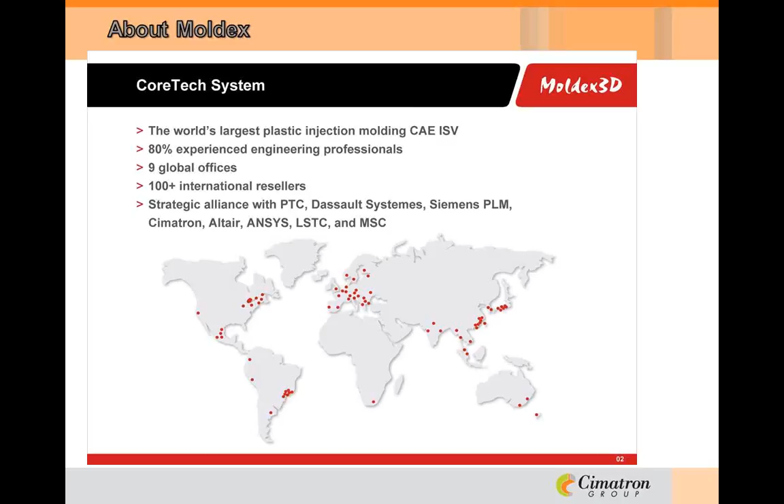Okay, thanks, Ralph. Moldex has a rich history of innovation and growth as a true industry leader. After combining various resources from academics, industry specialists, and customers, the predecessor of Moldex 3D was first released in the early 90s. It is believed to be the world's first CAE program to run on a Windows platform. In 2004, Moldex 3D was the first injection molding CAE to support parallel computing.

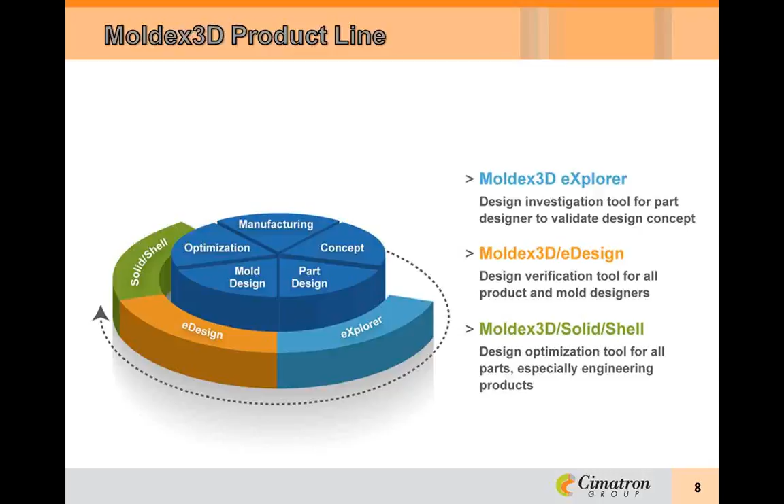Moldex 3D Solid Shell offers more advanced tools to decrease your product-to-market time and to improve the quality of the design with comprehensive analysis results. Today's focus will be on the mainstream product, eDesign. These 3 products present a single unified platform for all designers and CAE specialists at every stage of the product development cycle. It integrates all of your innovation, efficiency, and productivity to reach your design expectation and product optimization.

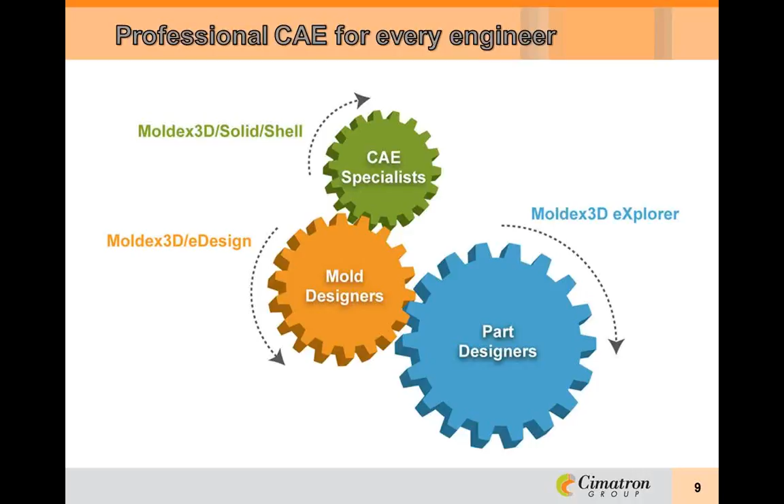In the design phase, there are several often difficult key decisions which product designers must make. For example, how to design the proper wall thickness and how to deal with thin wall products. What potential defects will be found during the tool design and molding process? These questions are extremely complicated and frustrating for product designers. What's worse is that they often do not have any tools to prove out their design concepts. Many times, the only way out for them is to hold the tool builder responsible for these corrections.

My background is tooling, and I happen to know the tooling guys are so nice, they often do this for free anyhow, right? The truth is, these problems should have been solved before the mold design phase. The reality is, both of them definitely need to think about these issues.

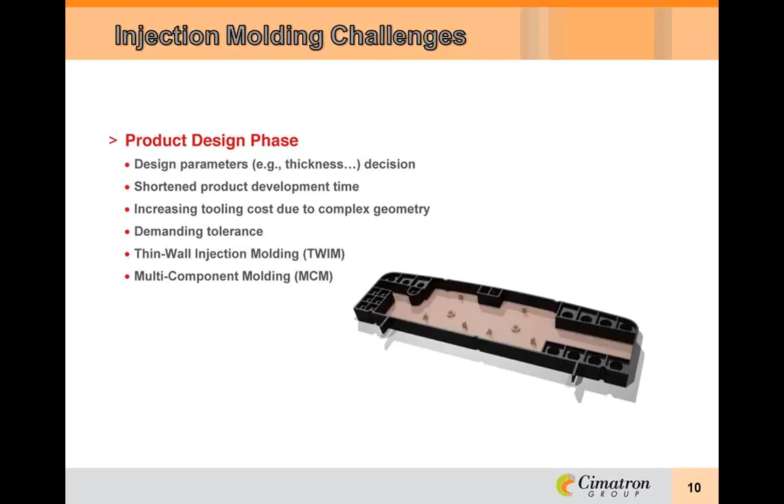The primary tasks of an injection mold include the accommodation and distribution of the melt, precise temperature control to properly solidify the material, and ejection of the molded part. Additionally, a mold has to provide good tooling or steel conditions and mechanical functions such as slides and lifters, all while holding tight tolerances on the part after the warpage and shrinkage of the solidification of the material. This places an enormous challenge on the mold designer.

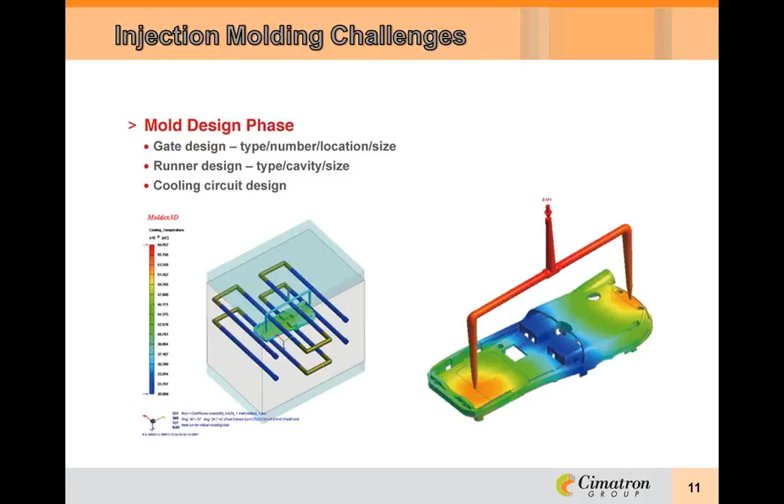eDesign supplies the tools to help evaluate the size and layout of the runner system, gate location and type, adequate cooling circuit, and appropriate number of cavities.

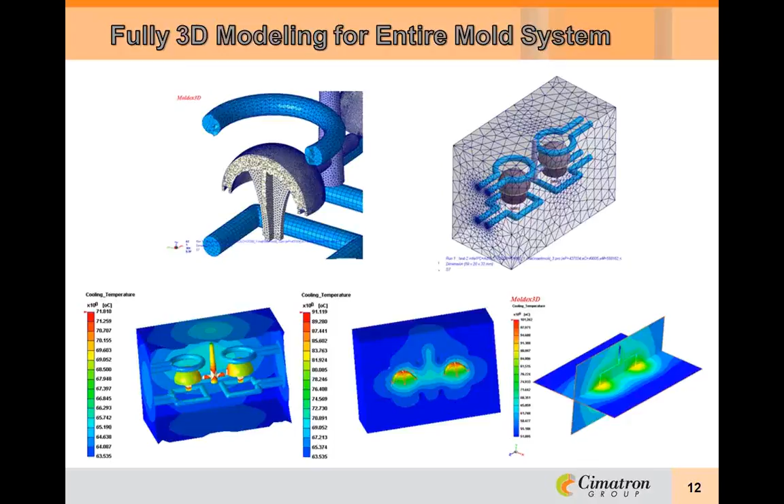Taking some of the guesswork out of the design process is made further efficient since eDesign can take CAD data directly from your 3D mold design in order to simulate the actual process conditions before any steel is ever cut. As you will see later in this presentation, with parallel computing ability and the few required steps to get to the simulation, you will see that there is very little time invested for maximum return of prediction and knowledge.

Burn marks, black or brown burnt areas on the part, usually located at the furthest point from the gate where the air is trapped. A weld line, also known as a knit line, where the flow front meets. Sink marks, which would be localized depressions, usually in the thicker areas of the part. Warpage, which of course is just the part that's been distorted during the shrinking process. And flash, which would be excessive material, usually in thin layers that leak out at the parting line and of course exceed the normal part geometry.

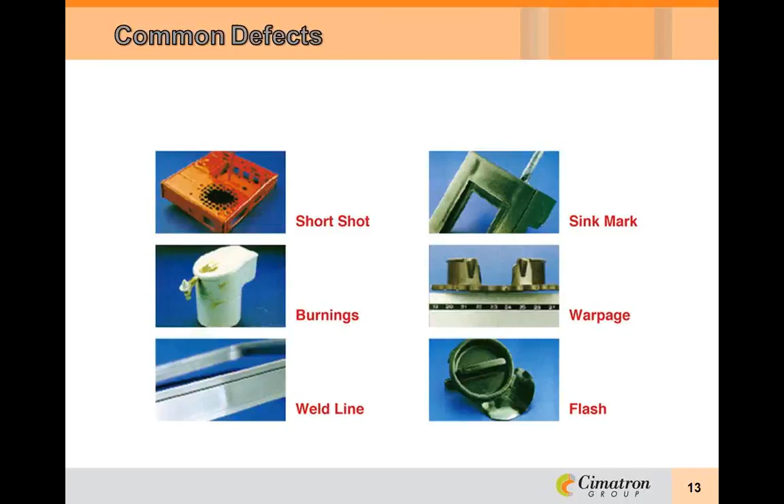With the CAE approach, a process simulation is launched before the prototype mold is ever constructed. In other words, prototyping is done on the computer. In the design phase, a part designer evaluates the influence of material selection and processing on the various part specifications. The analysis is based on physics principles and actual conditions, rather than a rough estimate from handbooks. Part wall thickness can be optimized to facilitate its processing feasibility and product performance. Part design is very flexible since the real mold has not been built yet.

In the mold design phase, the design is further refined by adding molding considerations. Runner system and gate are designed according to the process dynamics simulation. Cooling system is optimized to shorten the cycle time and improve part quality. The molding trial on the computer is possible before the actual molding trial is ever conducted. In this way, mold construction has not begun until the molding trials on the computer meet the requirements. The interrelation of part design, material selection, part performance, and processing is all taken into account. Modification of part design and mold design is flexible and concurrent.

After the mold design is accomplished, the mold is constructed and actual molding trials are conducted to evaluate the mold's feasibility. The time and materials, also known as money, used in molding trials and part testing are minimized since the design has been comprehensively evaluated. Production can then begin and the product development is finished.

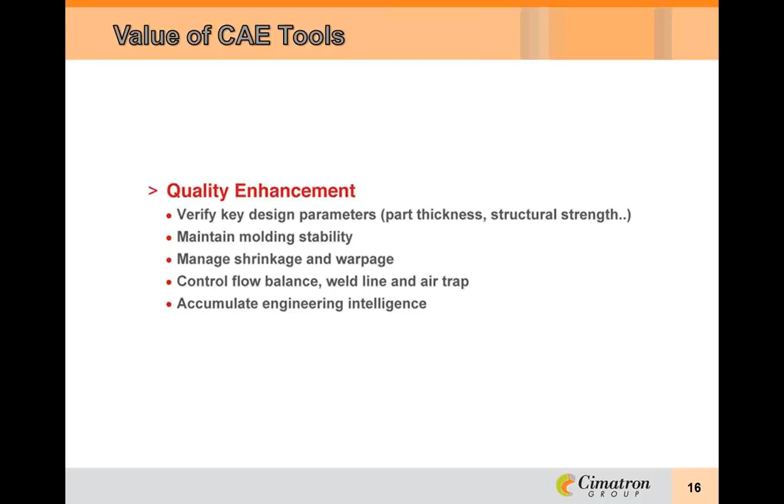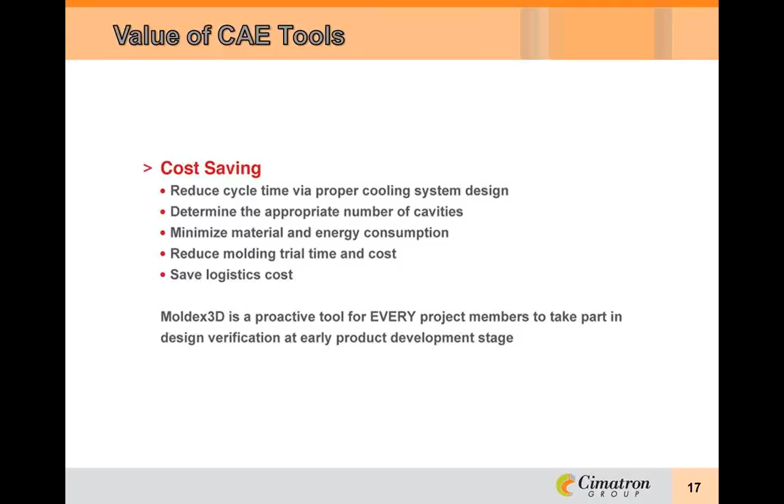In fact, unprecedented global competition is pressing industries to meet various customer demands for better quality, lower cost, eco-friendliness, and so on. People keep looking for more cost-effective and smarter ways to improve the efficiency and profitability. Finding problems and learning solutions from trial and error is a traditional approach and very cost-consuming. To effectively eliminate uncertainty and associated financial losses, an efficient engineering tool becomes more and more necessary to increase competitiveness. By simulating the filling process of injection molded parts, Moldex3D ensures both originality and manufacturability in the design and molding phase. Design teams can easily use Moldex3D as a collaborative tool to identify potential problems and solutions.

Although Moldex3D is incredibly powerful and accurate, it is surprising how easy it is to use. There is no mesh preparation. The part model is simply imported as an STL, and the mesh is generated automatically. The runner and gates can be drawn in eDesign or imported either as STL or wireframe, which would permit parametric attributes to be assigned inside eDesign, which means that the runner, gates, and water circuit diameters can all be modified without the need for data exchange.

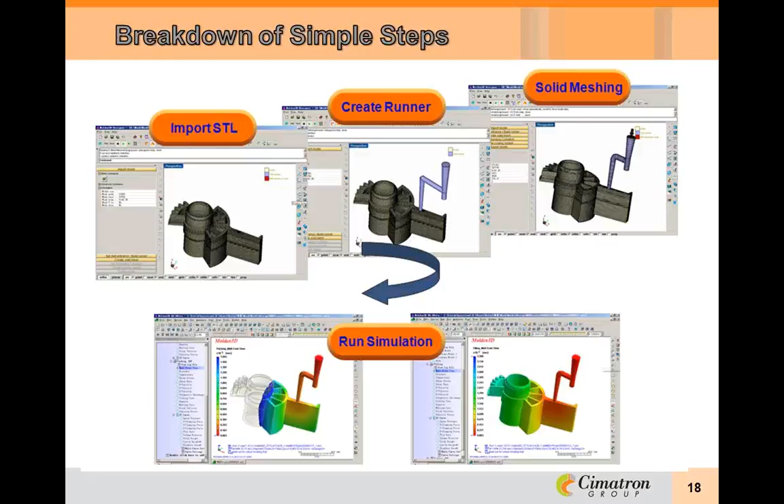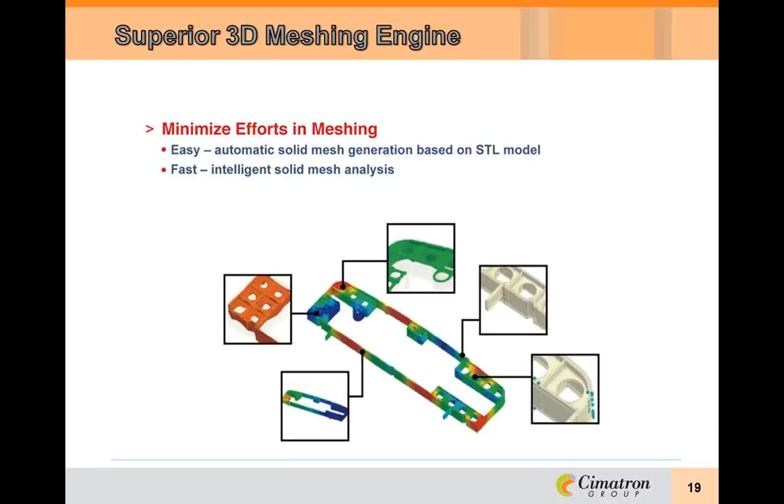eDesign provides the most friendly pre-process environment. The most advanced meshing technology is employed to help users generate true 3D solid mesh of outstanding quality without the need for any pre-process work.

eDesign Runner Wizard provides powerful yet intelligent guidance for your design. Now you can define runner systems and optimize the mold design with ease.

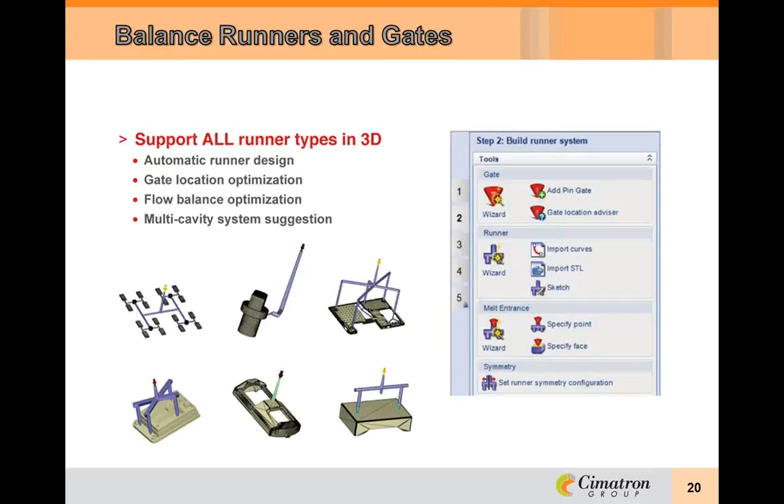eDesign also offers a cooling channel wizard. Users can quickly define the cooling circuit and configure it inside eDesign as an alternative to importing it from another CAD system. More advanced options are also available to enable customization according to the user's requirements, to automate the creation of an entire cooling system and subsequently speed up the optimization.

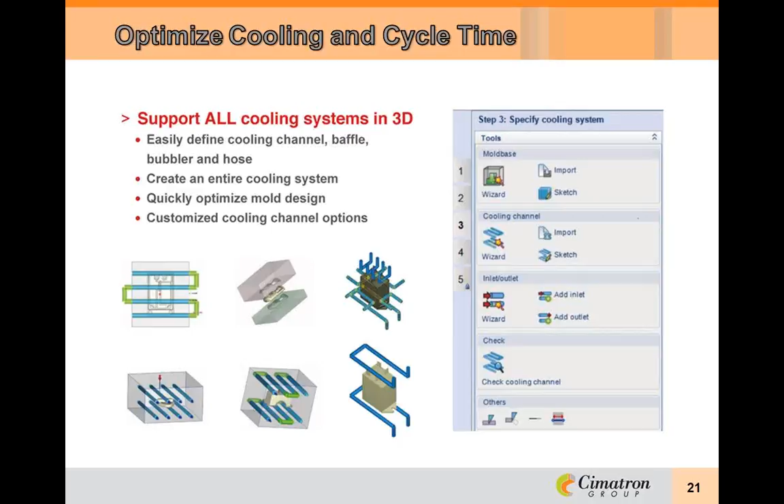Next, let's have a closer look at the Moldex 3D modules. Moldex 3D standard modules are flow, pack, cool, and warp. Advanced modules are fiber, multi-component molding, hereafter referred to as MCM, reactive injection molding, optics, viscoelasticity, and injection compression molding.

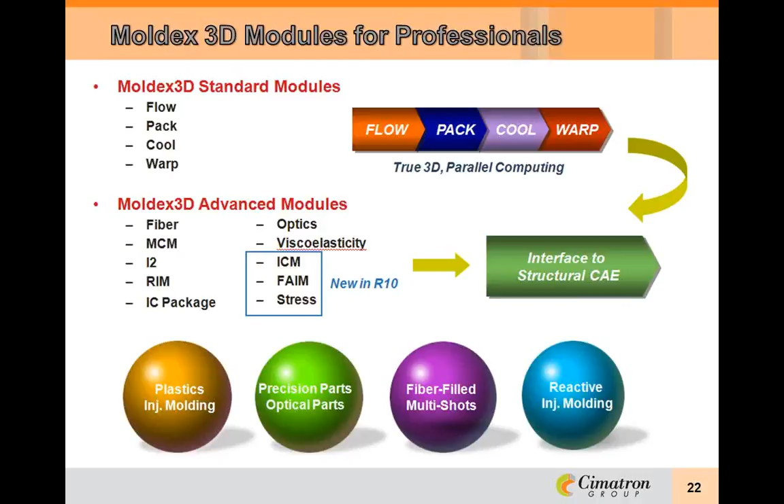eDesign Flow gives you accurate insight into solid plastic flow behaviors from a macro view to a micro view, such as fountain flow, inertia effect, and gravity effect. Users can better understand how the solid melt flow progresses, accurately identify where the knit lines are, and examine short shot problems. If more than one gate is used to fill a part, you will see in different colors the material contribution from each gate and where they meet.

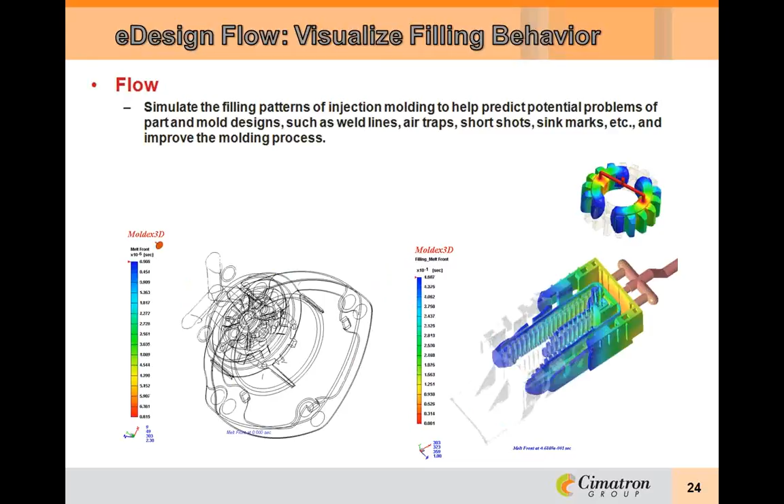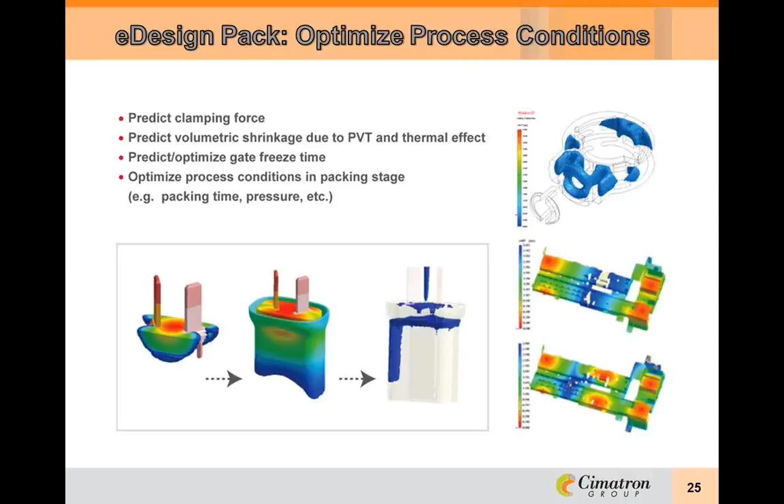eDesign Pack incorporates material compressibility, or PVT, change to account for the density variation and melt flow behaviors in the packing process for thermoplastic materials. Its true 3D technology can help you precisely determine gate freeze time, efficient packing time, and proper packing pressure to minimize areas of high volumetric shrinkage. Here we can see the packing volumetric shrinkage.

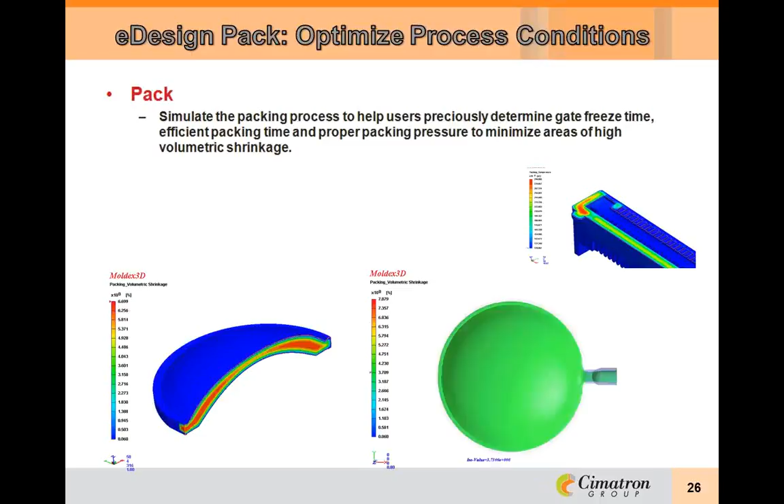eDesign Cool, with its true 3D analytical core, can accurately analyze the mold temperature, the efficiency of cooling channel layout, and the required cooling time in the design phase. It is a useful tool to detect potential defects in the mold cooling system, such as unbalanced cooling, hot spots, and prolonged cooling time due to poor cooling efficiency. You can accurately evaluate the cooling efficiency to further optimize the cooling system and reduce cycle time.

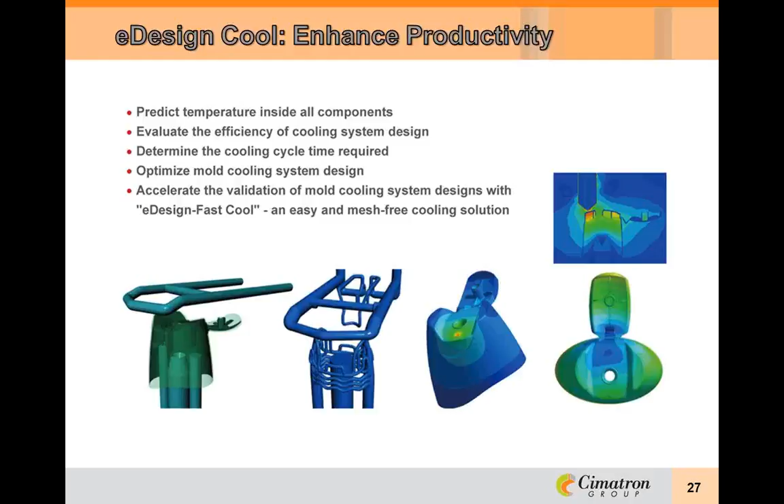Here we see dynamic slicing through the part in order to look for hot spots in the part. This will help us fully evaluate the cooling system.

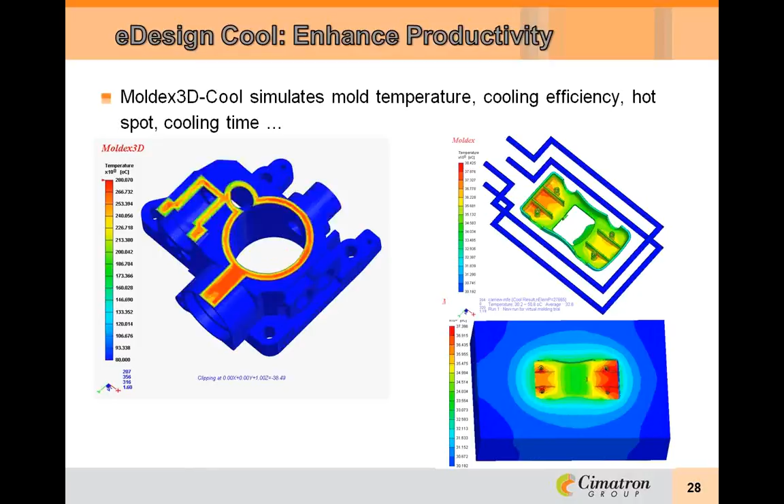eDesign Warp provides users a true 3D simulation tool to anatomize the causes of shrinkage and warpage and further control these defects before the mold is built. You can easily and efficiently improve part quality and optimize design. For fiber-filled material, eDesign Warp incorporates fiber composite theories and the fiber orientation results from eDesign Fiber to predict its anisotropic shrinkage and warpage.

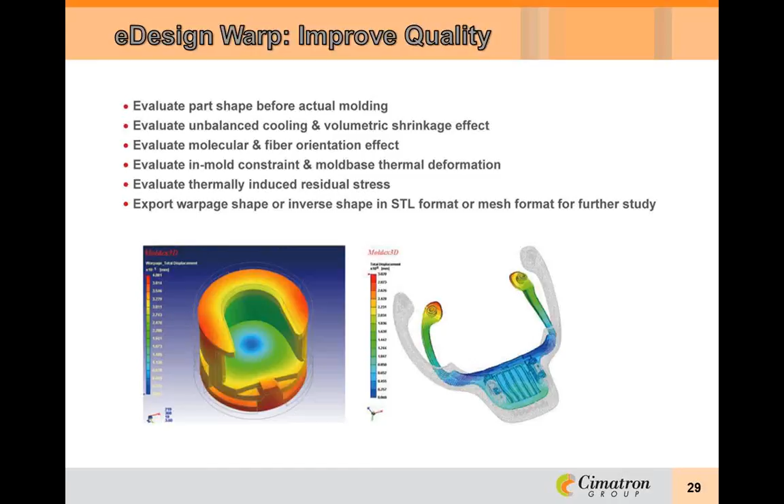Here we can see a scaled-up animation of the warpage behavior. I can't help but think of a specific automotive headliner part that I worked on just a few years back that could have really benefited from this kind of prediction. We knew it was going to warp, and we tried to cut the steel safe, but as I recall, I think that we recut that mold at least 4 times before we finally produced a part within spec.

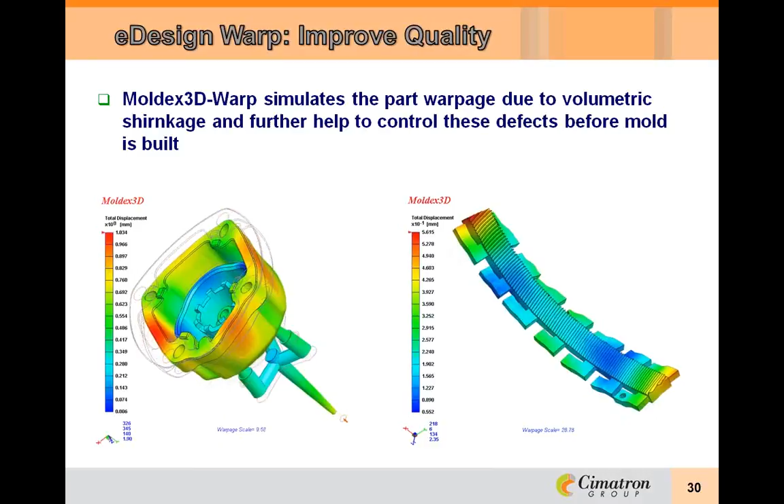Moldex3D Fiber accurately simulates the 3D fiber orientation in the mold filling process and further calculates the process-induced anisotropic thermomechanical properties of fiber-reinforced plastic parts. Users can understand the 3D orientation of fiber and further control the anisotropic shrinkage of fiber-reinforced parts.

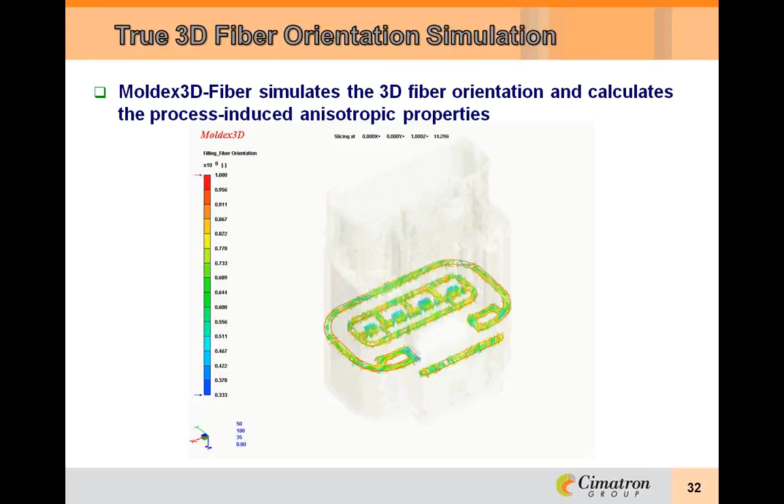Here again, we see dynamic sectioning of the part in order to better understand the fiber orientation. Here we can see the type of influence that fiber has when producing this part.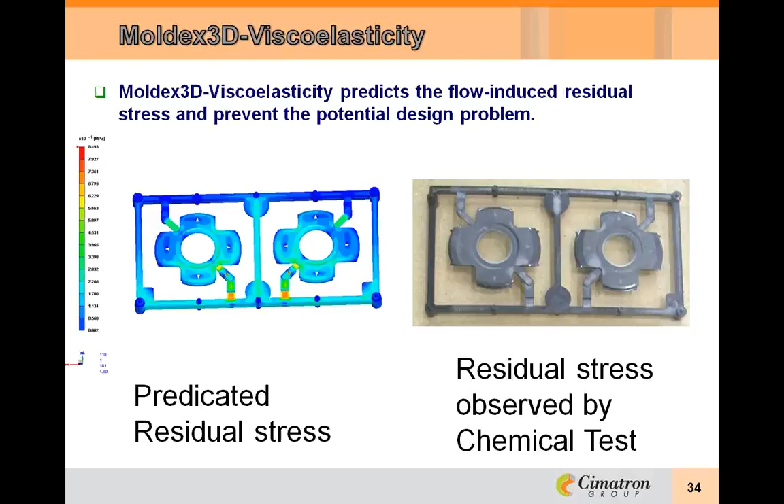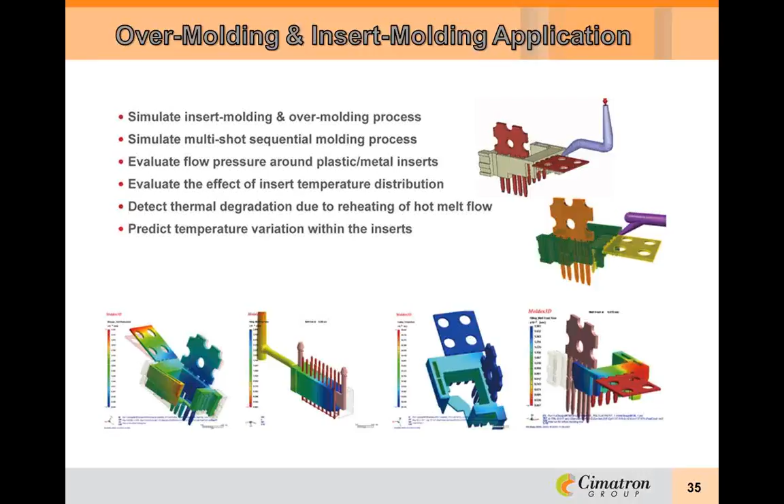eDesign multi-component molding gives you a powerful tool to accurately analyze the interaction of different components and further optimize product design. Users can freely model any kind of metal or plastic inserts and perform comprehensive analysis. With eDesign MCM, you can predict the prolonged cooling time, asymmetric shrinkage, and two-color or overmolding processes, and consider warpage of the different material combinations.

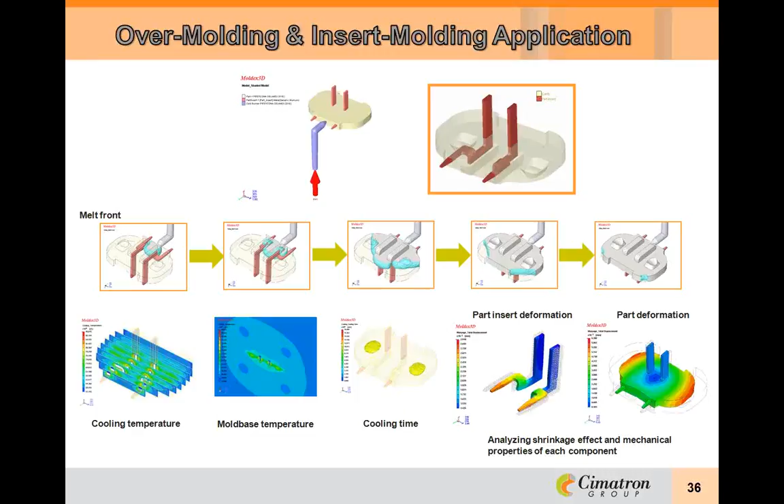Here is an example of MCM where it's looking at steel inserts around the plastic and checking them for deformation. Here's another animation that shows the warpage behavior during the overmolding process.

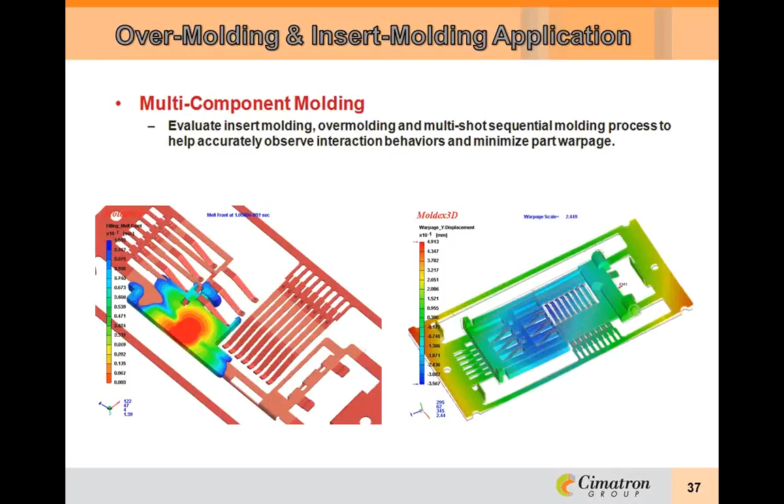Moldex3D is the only CAE solution which supports parallel computing for flow, pack, cool, warp, fiber, MCM, and so on. By utilizing the strength of multi-core computers, the time required for analysis is greatly shortened. Moldex3D parallel computing technology supports PC clusters as well.

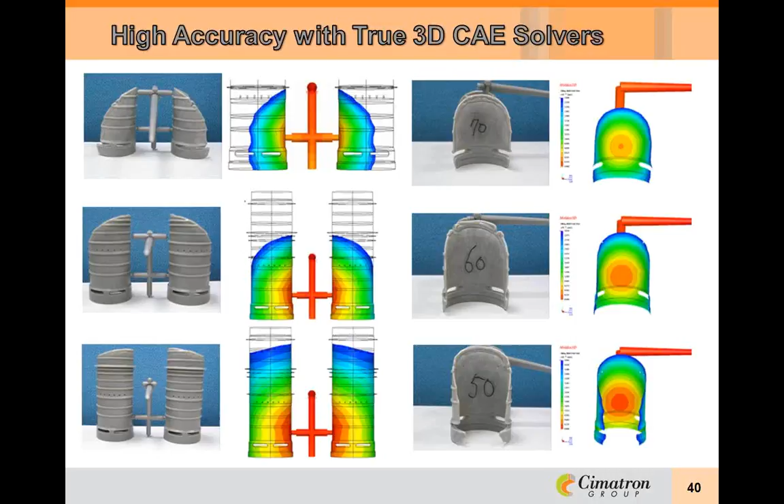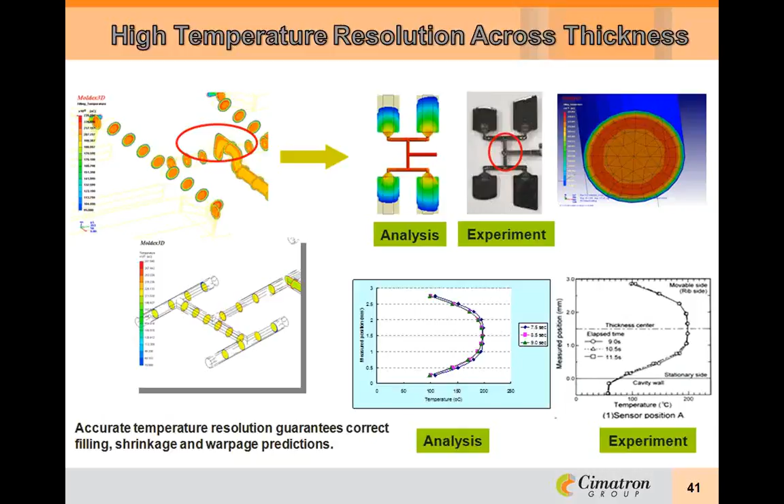Moldex3D not only simulates the part in true 3D, but also the runner system. You might question why this is important. The reason is because of what is called shear heating phenomenon. While the material is flowing through the runner system, friction is creating heat. This heat does have an impact on material flow, and the next few slides will demonstrate this.

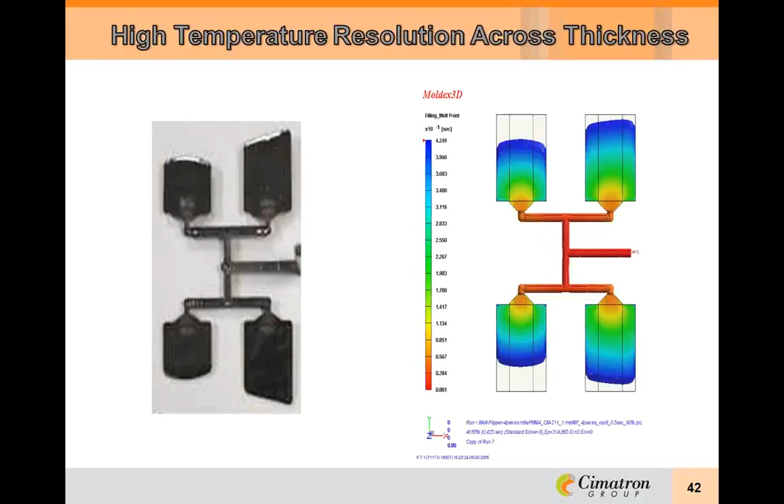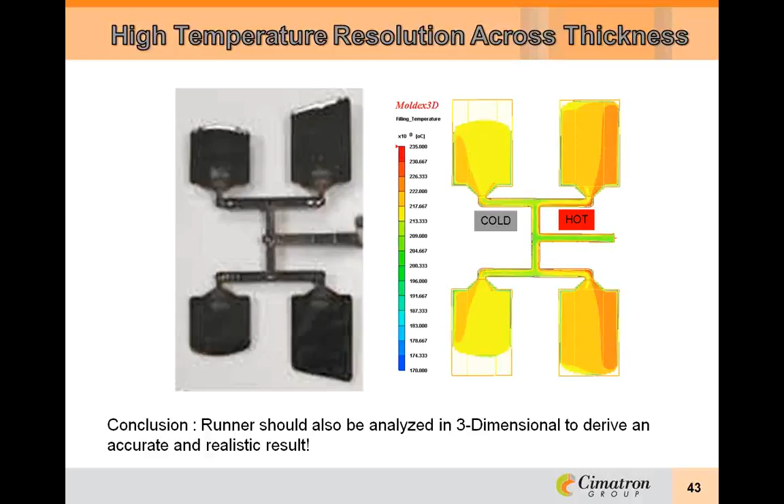The picture on the left is the left half of an actual shot of an 8-cavity mold. The simulation picture on the right predicted it due to temperature influence from the runner. And you can see where it says cold and hot, that temperature difference causes the inner cavities to fill faster. So the conclusion here is that the runner should also be analyzed in 3D to derive an accurate and realistic result.

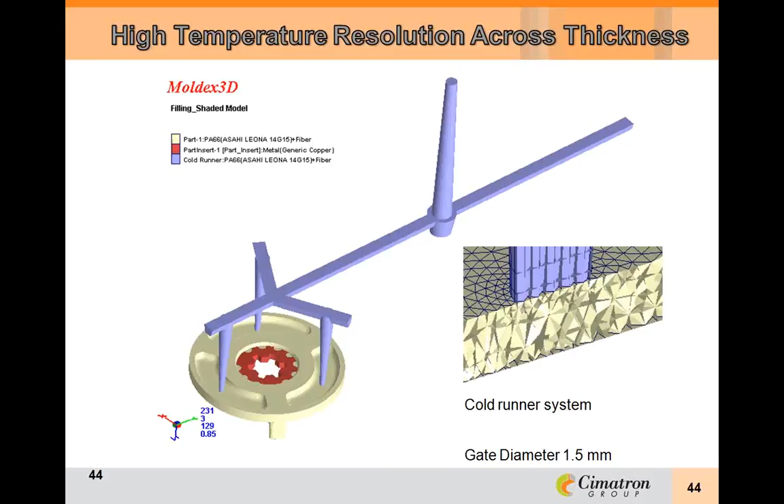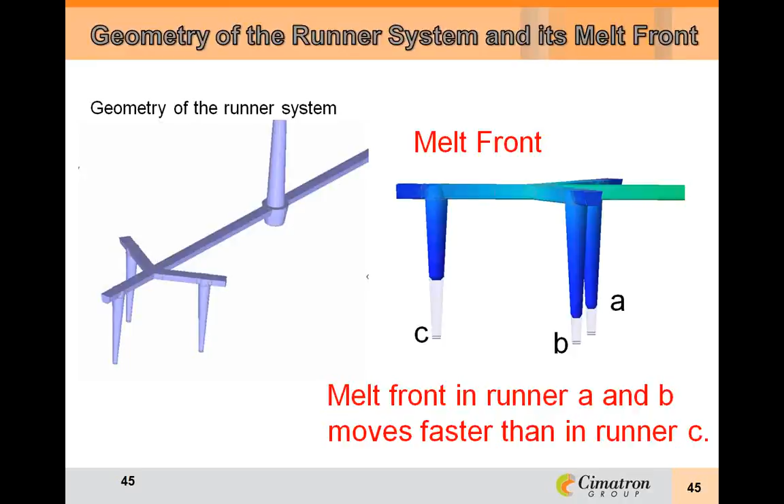Here again we see the accurate prediction of flow pattern when compared to the real molded parts. This could only be achieved by calculating the shear heating in the runner system. These are the kinds of variables that are often not considered in traditional mold designs and cannot be predicted accurately without 3D CAE software.

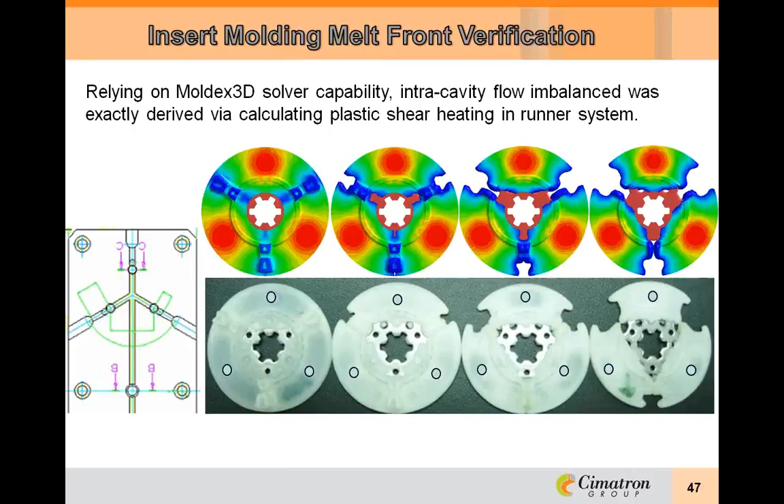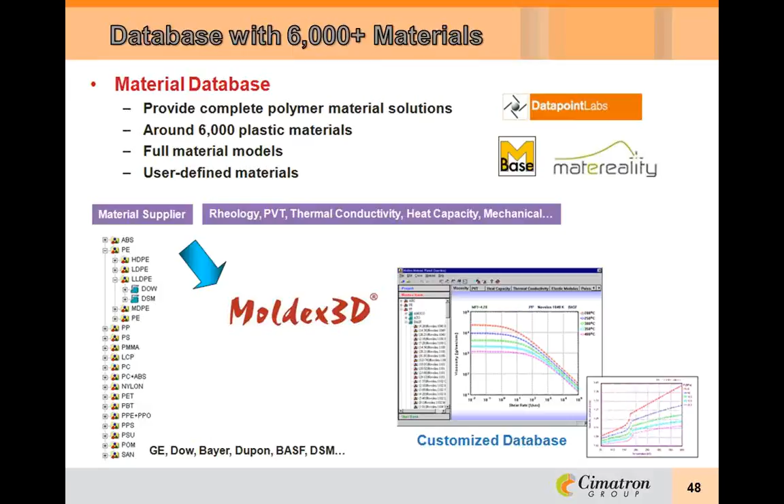An extensive material database comes standard with Moldex3D. Any materials that are not in the database can be added easily.

Best-in-class technical support can be accessed globally. Yeah, and the North American office is in Novi, Michigan.

Okay, next let's take a look at some examples.

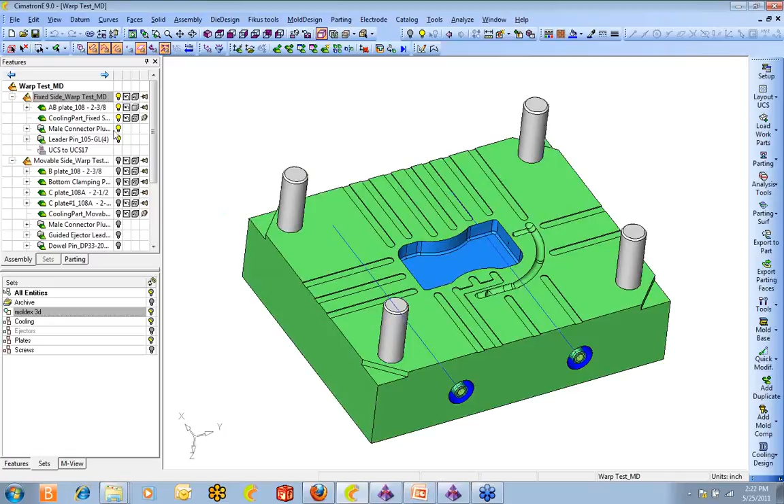The first thing that I want to show is what I started with in Cimatron. I have a 3D mold design here, and let me turn a few things off and on real quick.

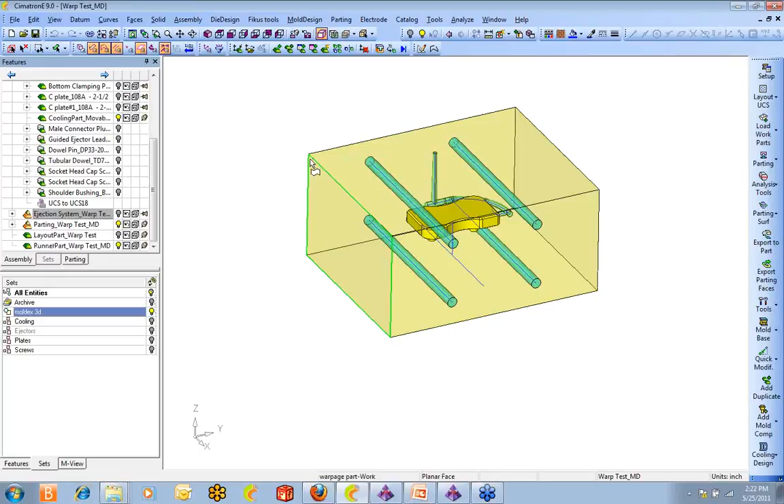All right, so I've got a 3D design ready, but what I'm actually going to take into Moldex is this. I'm taking a bounding box that represents the A plate and the B plate. I'm taking the cooling circuit, of course the part, and the runner system. But in this case, I only took the wire frame. The only thing I took as an STL was the part, and everything else was wireframe in order to set the parametric attributes inside eDesign.

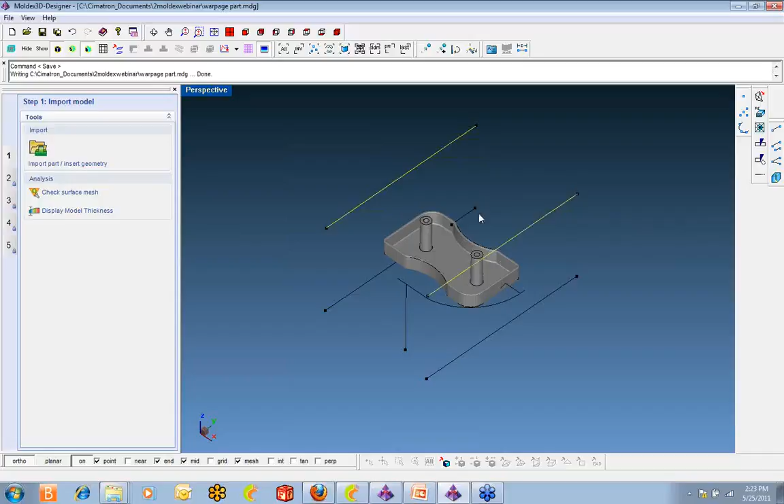Let's take a look at that. Okay, so here in eDesign, we have the part that I brought in as an STL, and of course the wireframe. So I'm going to pick on the cooling circuits first, and we're going to assign an attribute as the cooling channel, 0.438 inch diameter.

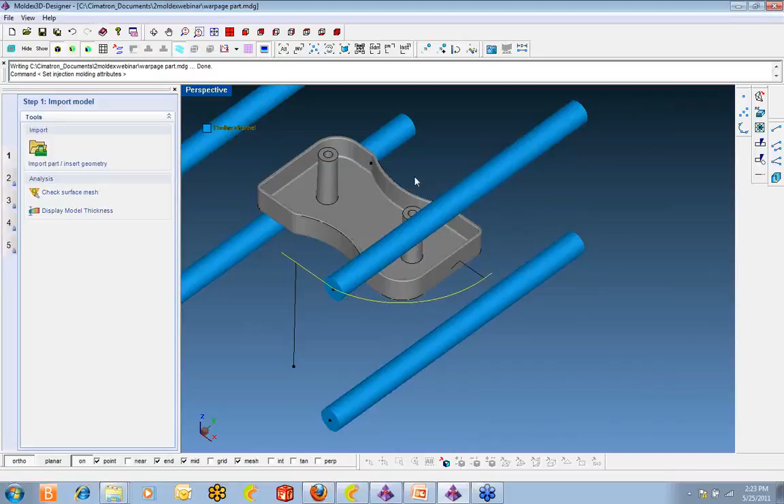And next, let's take the runner. And we're going to assign the attribute of cold runner, and this diameter will be 0.250. And this one also is a cold runner, the diameter is 0.188. This one as well. And lastly will be the gate.

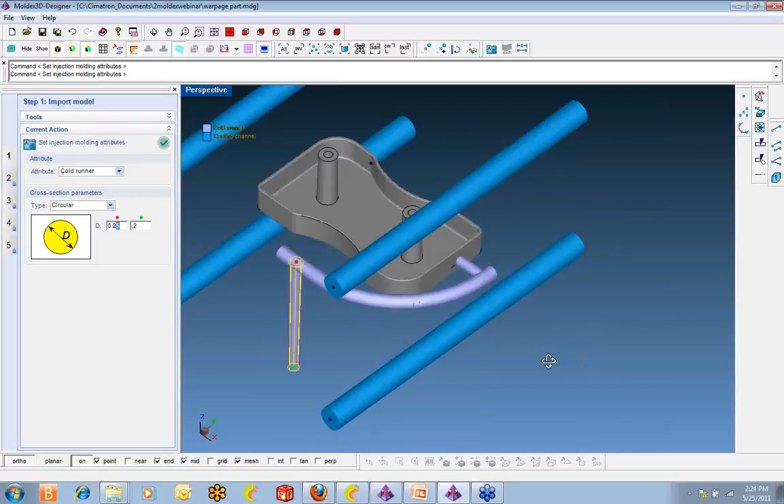Okay, and now we're going to just go through some of these steps. Yeah, I forgot the melt entrance. And the mold base - the mold base, again, is just a size representation of the A and the B plate.

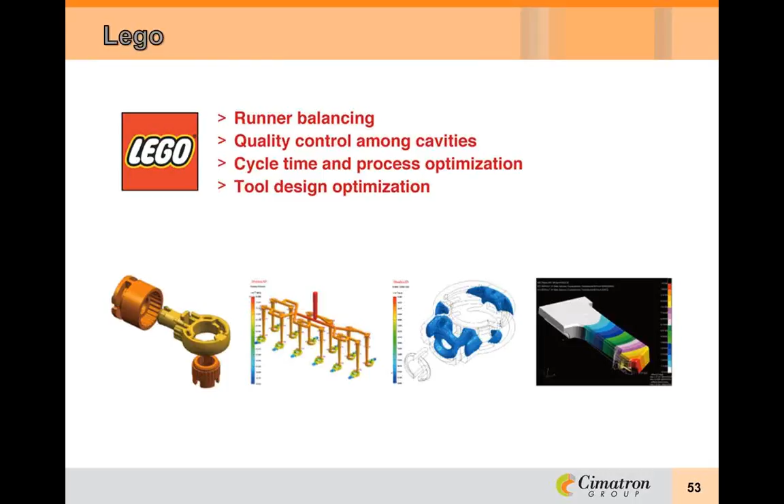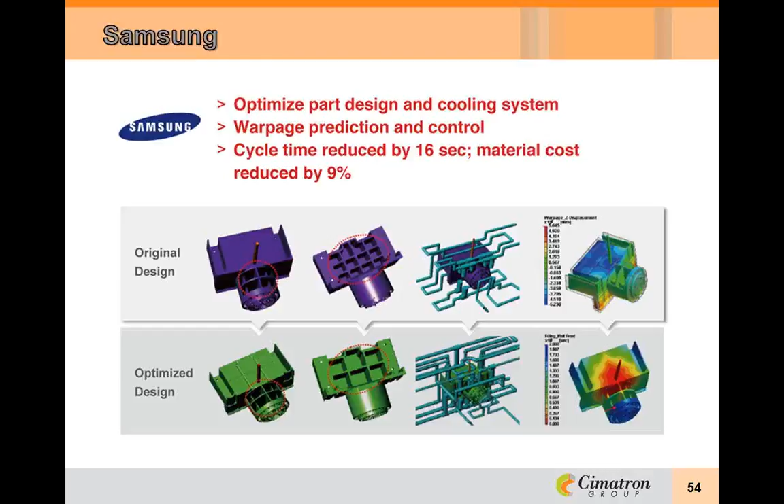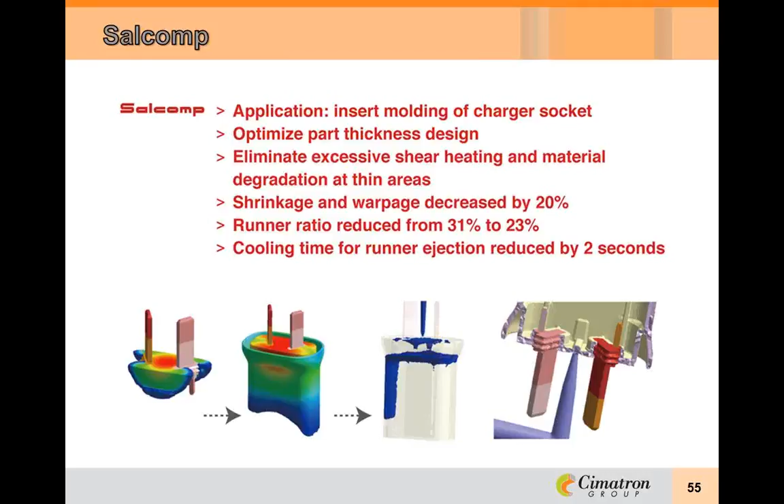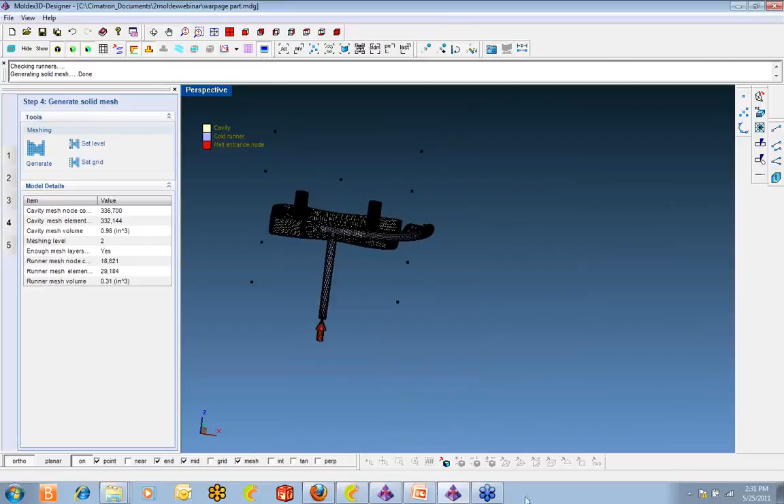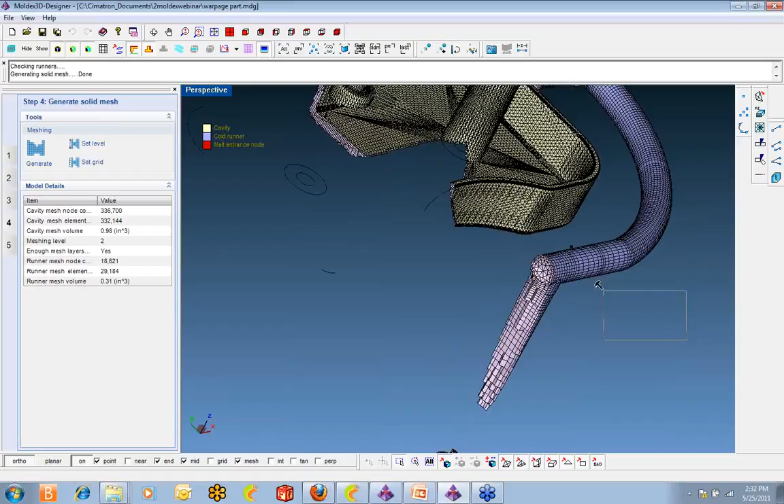Okay, so we're going back into the eDesign, and we're going to look at the mesh that was created automatically. I'm going to dynamically clip across the mesh and show you what it looks like. Here you can see the 3D filling inside of the mesh as we clip it away. And of course, the runner is also done in 3D.

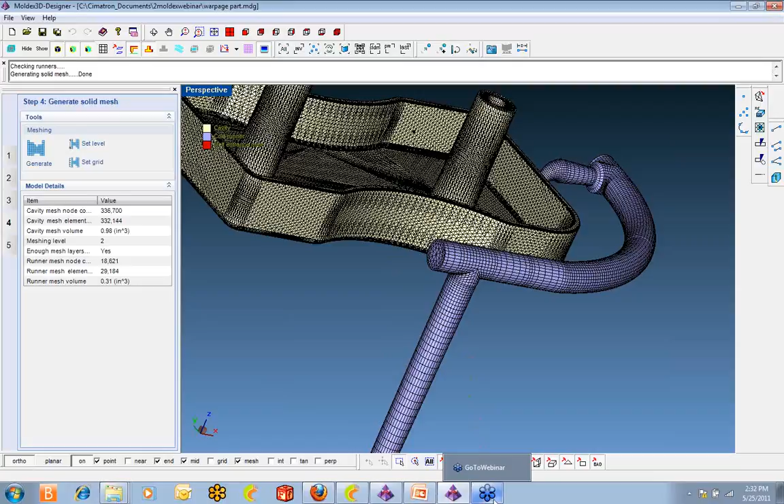So there's really nothing more to do with this one other than save it and take it into the project. And that's what I'm going to do now is open the project. Now, we actually did do 2 different runs with this part. I want to show a few things on run number 1, and then we'll talk about what we changed, and then I'll show you run number 2. So first, let me go to run number 1. I'm going to click on filling, and we're going to view the filling pattern in this model.

And what we're going to be looking for is temperature problems and warpage in this run. Okay, so let's have a look at the filling pattern.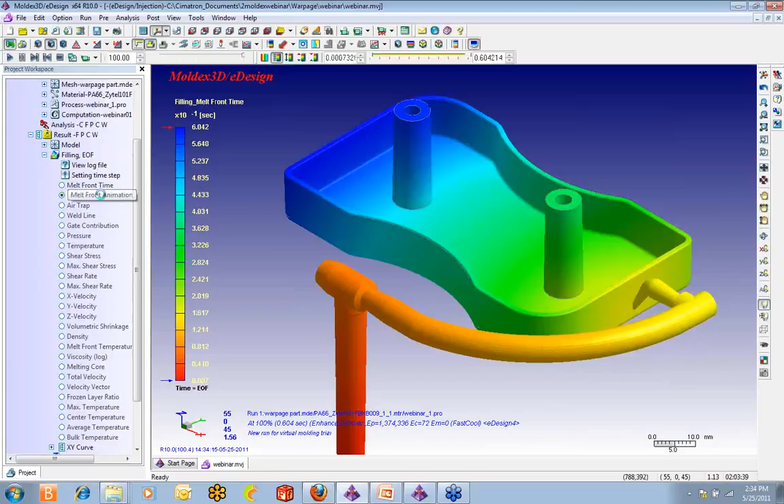Next, we'll look at the melt front animation. And this will show us the air traps.

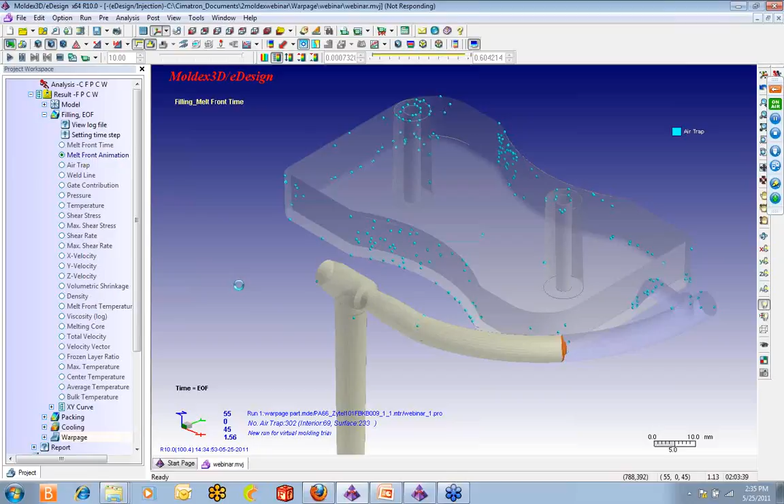Next, we're going to look at warpage. Here you can see what we're looking at right now is the X displacement, X being the longer axis. You can see on the chart we're talking about 1.6 millimeters. This part is not being adequately cooled, and therefore there's much more deformation than we would like to see.

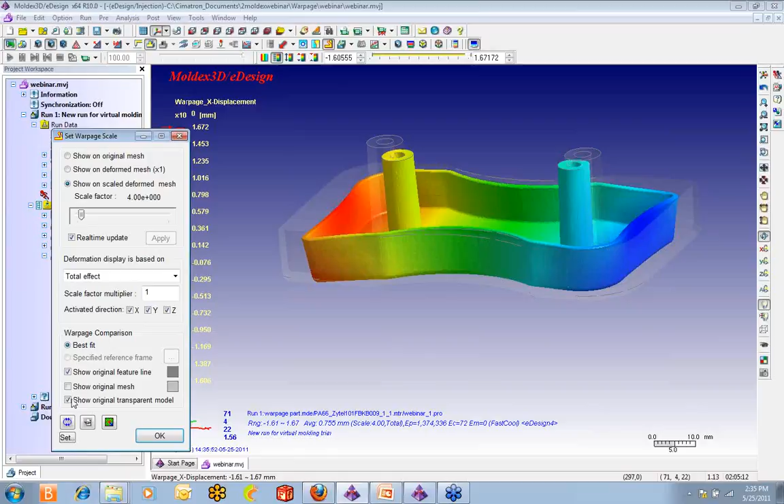We can animate this one as well to exaggerate what that looks like. You can see how the part will shrink and warp.

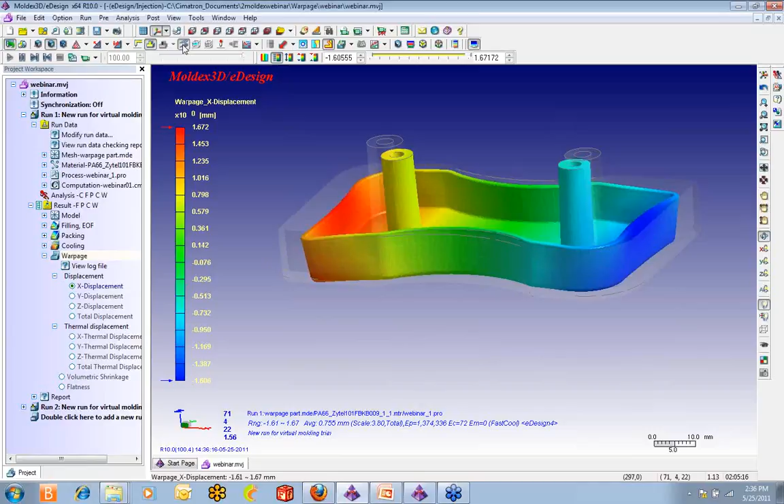Okay, now let's have a look at the cooling lines on this one. And you can see that we don't have any cooling in the center of the part.

In fact, we'll have a look at the temperature range real quick before we go in to show the second run.

Now, what we really want to look for on this part is a difference in heat from the inside of the part to the outside of the part. You'll notice that the back side of the part is blue and green, ranging from 90 to 100, and the top of the part is more yellow, which is like 120. So it's a pretty big difference, and potentially a problem. Well, evidently it's a problem because we're seeing it in the warping stage.

So now let's have a look at run 2, and we'll show what we did to improve it.

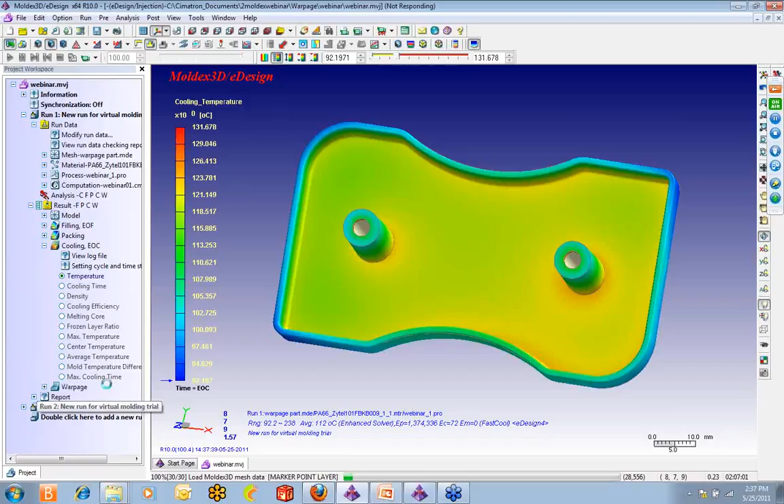Here in run 2, you can see that we added another line in the baffle to try to bring more cooling closer to the part. So let's have a look at the cooling and see what the difference is with this one.

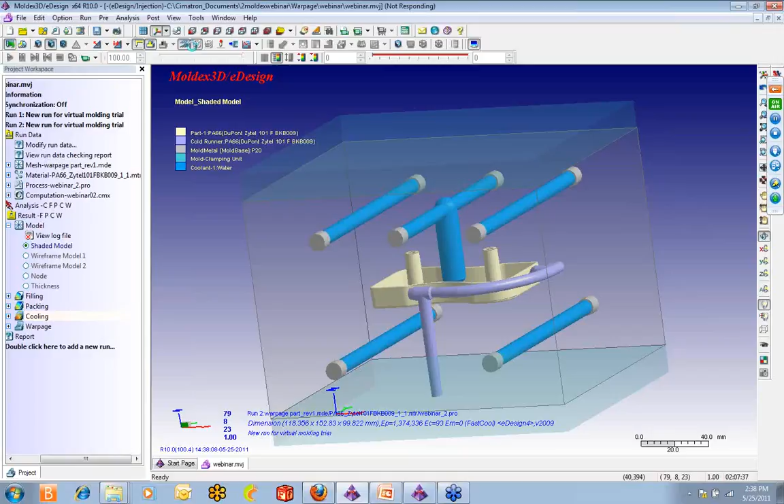All right, now as we interrogate the temperature, we'll see that there's not as much variation from the bottom of the part to the top of the part, and of course it's being better cooled by the baffle.

And now if we consider what the warpage is like as a result, we'll compare the two.

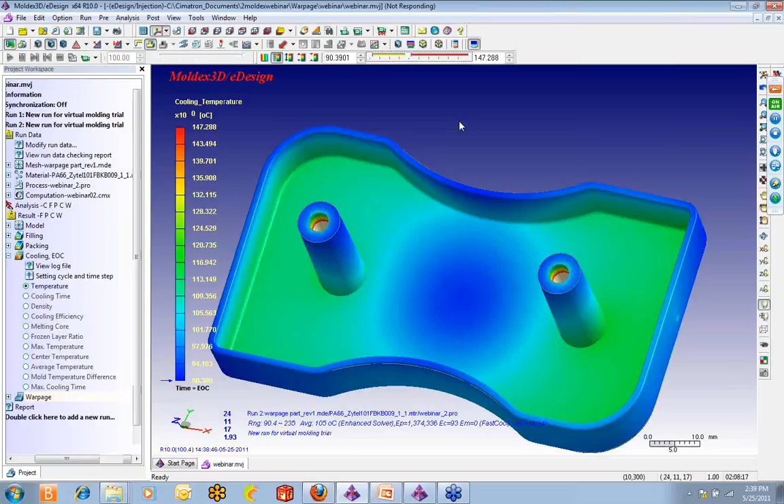Here we can see that at the worst case, we're at 0.25. So we went from 1.5 mil to a quarter mil in warpage result. It's a dramatic difference.

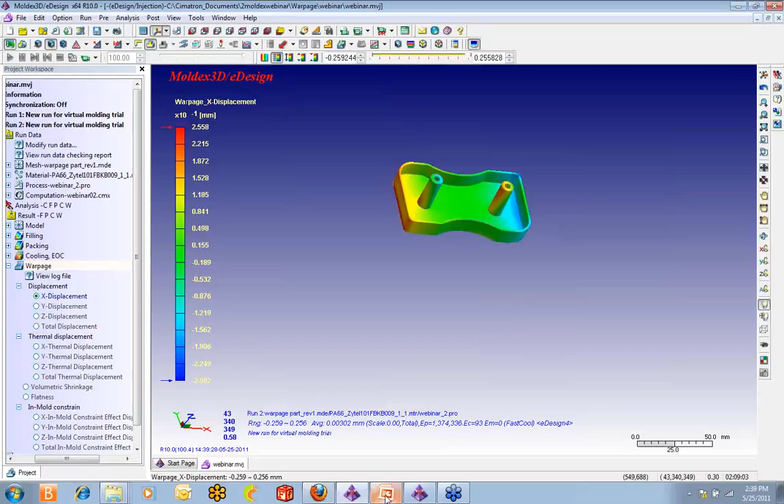All right, now we'll go back to the PowerPoint for a second here.

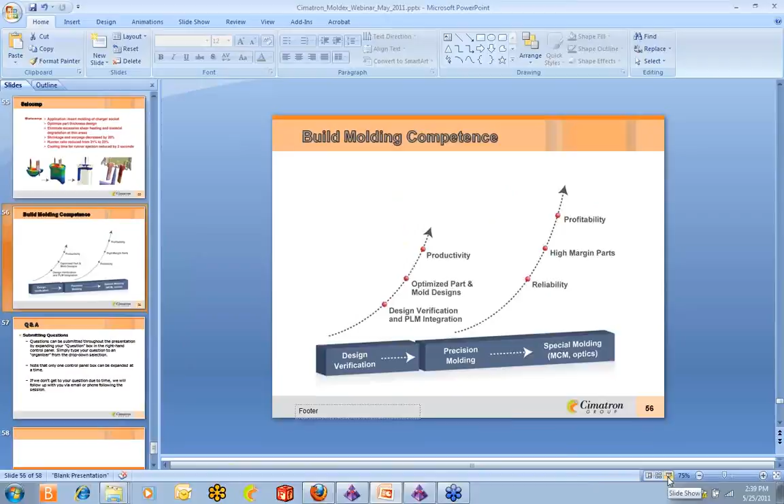In closing, the concept is simply that if both product and tooling designs are verified early enough in the design stage, it will help to eliminate unknown issues and optimize the entire injection molding process, which leads to higher margins and shorter delivery times. This can become a real competitive advantage over those who decide to stay with the traditional trial and error approach.

For tool makers, there is also the added benefit of being able to provide such a service. For a long time, CAE software was too cost prohibitive for tool shops. Now, however, it is much more affordable and will likely become commonplace in the not too distant future. Cimatron understands this and wants its customers to be on the leading edge of technology, which is why we wanted to bring these ideas to your attention.

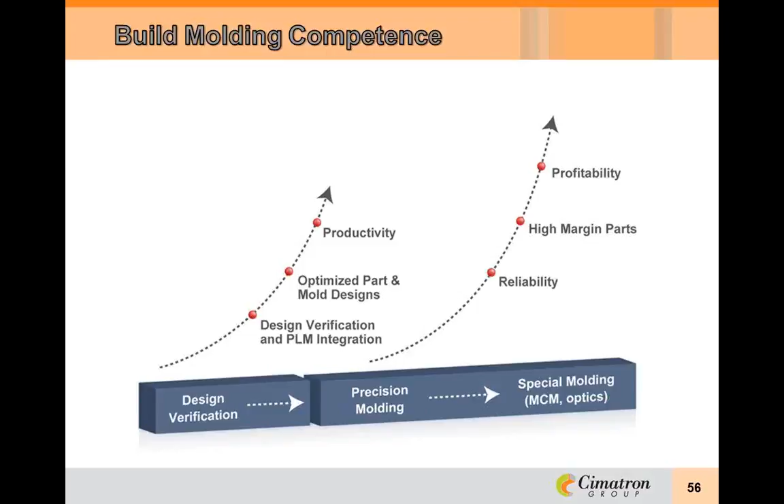Thanks, John. Again, you can simply type in your questions in the right-hand side in the question box. We do have one question: how many users are out there? Again, for Cimatron, there's 40,000 plus. For Moldex, there's over 5,000 worldwide.

Another question we got is, what's the difference between Moldex and Moldflow? Ken, would you like to respond to that? Yes. As you could see during the presentation, we could generate a solid mesh, not only cavity. We are able to generate the runner with a 3D mesh. Using our solvers, we could capture the shear heating phenomena in order to get a good warpage result. This is a very big feature. Meanwhile, we also support parallel computing, so as long as the users could provide us good hardware, simulation time won't be a problem to simulate 3D mesh.